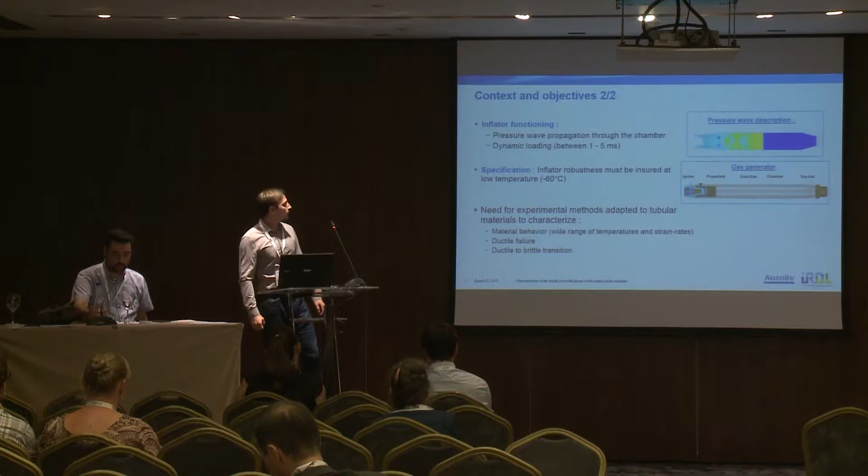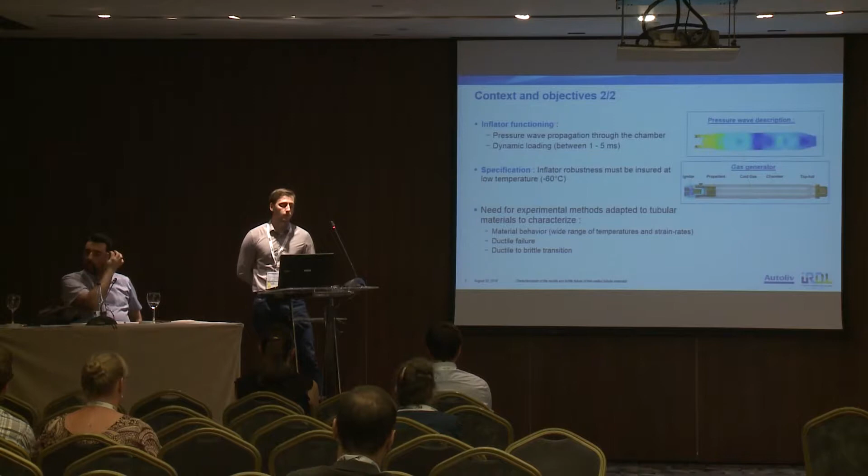There is a very thin grain size, close to 3 micrometers. Also, during inflator functioning, there is dynamic loading of the chamber due to pressure wave propagation through the chamber. In the automotive industry, you have to validate certain specifications, and the most critical one is that inflator robustness must be ensured at low temperature, minus 60 degrees Celsius. So here you combine high-strength steel with a very thin microstructure, high strain rate loading, and low temperature conditions. Brittle failure can occur, and this mode of failure is really critical.

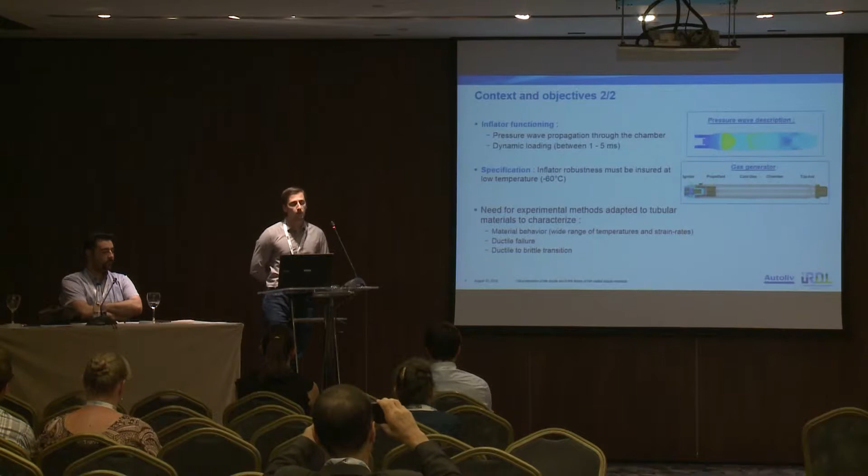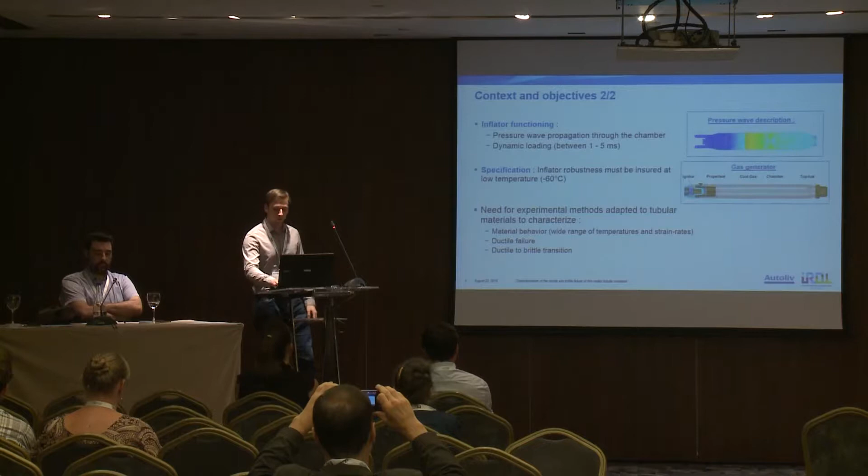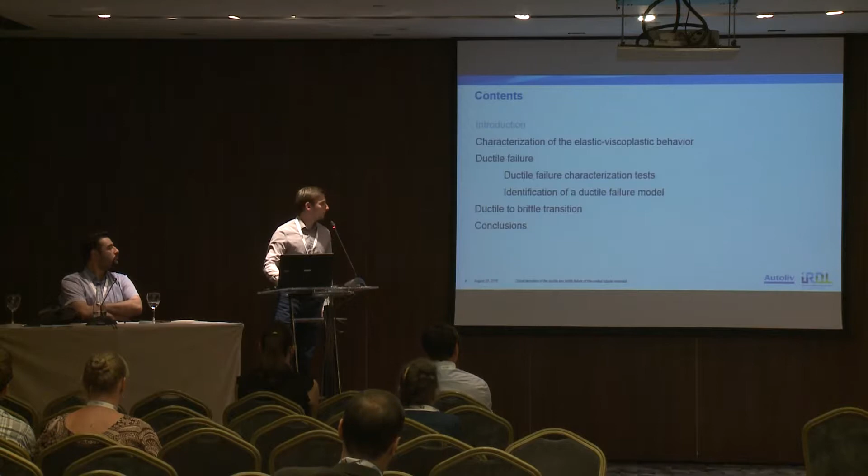So we have to be sure that it doesn't occur. That's why there's a need for an experimental method adapted to tubular materials, able to characterize material behavior, ductile failure, and ductile to brittle transition. That's why my presentation has 3 different points: characterization, ductile failure, and ductile to brittle transition. To finish, I will conclude. So let's start with the material characterization.

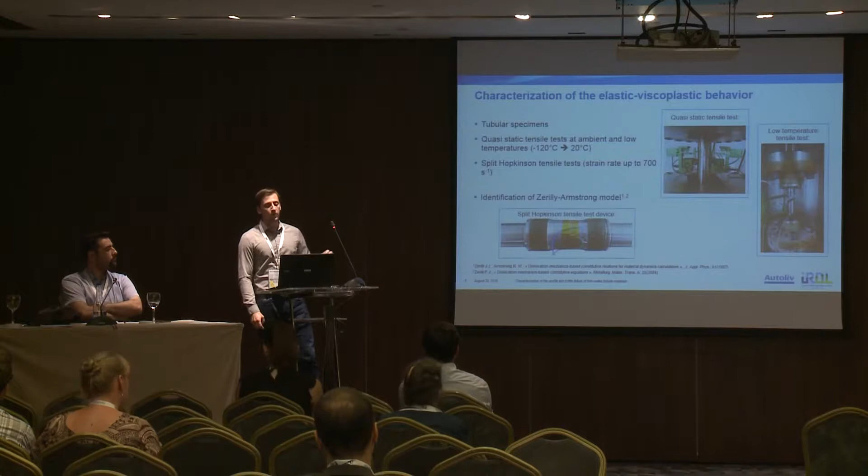First of all, I can only work with tubular specimens. Why? Because the steel supplier is not able to produce the same material in a flat shape. So for quasi-static tensile tests at room temperature and low temperature, I have to use tubular samples with a defined geometry.

Also for Split-Hopkinson tensile tests, made to characterize the strain rate sensitivity of our material, we have to deal with tubular samples. That's why we developed, in my laboratory, a new methodology to apply tubular samples to Split-Hopkinson tensile tests. If you have any questions, I could answer at the end of this presentation.

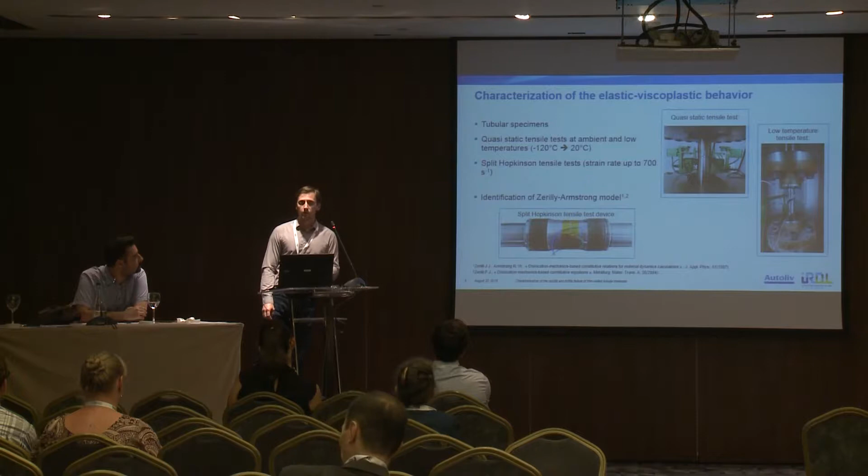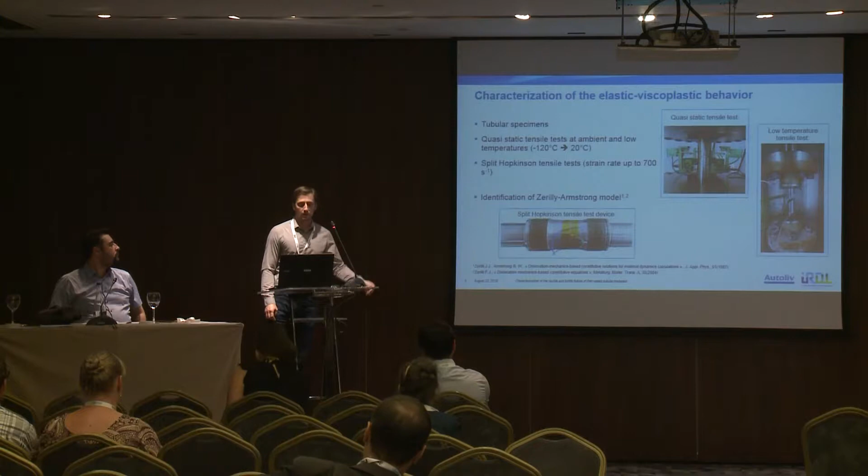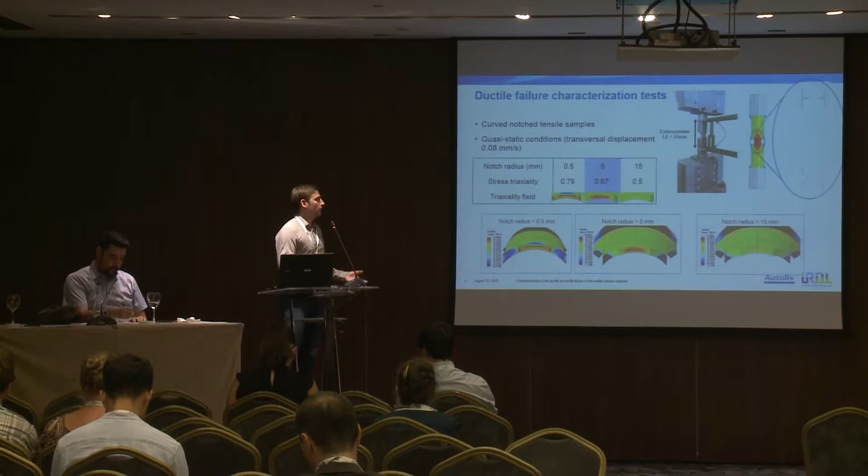Finally, with these 3 different kinds of tests, we were able to identify the Zerilli-Armstrong model and its parameters. Once the material behavior was fully defined, we started to study the ductile failure properties. To study this, we used notch samples, but here we used curved notch samples. There were many simulations, firstly to determine the 3 different notch radii that we would use.

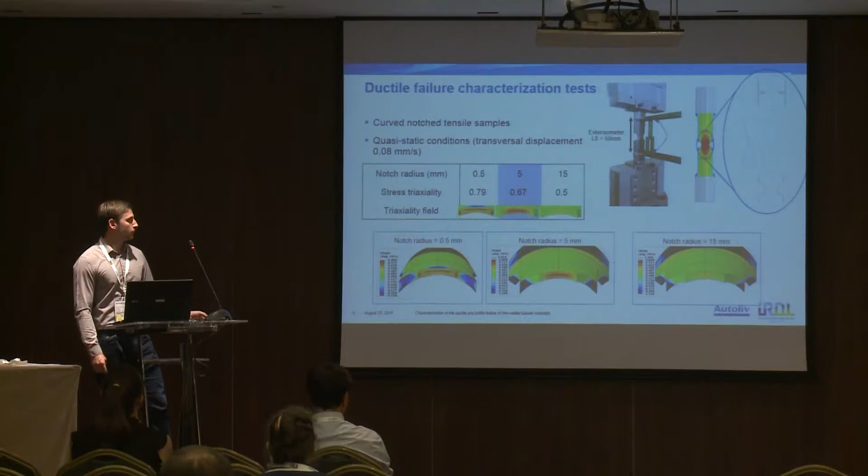As we are using 3 different radius, there are 3 different maximal stress triaxiality and 3 different stress triaxiality values. When design were stopped, we proceed to the test and get the following results: the curve force versus displacement for the 3 different notch radius of our sample.

Firstly there is a pop-in phenomena which occurs during our test. This is due to the very low ductility of our material.

In order to determine the maximal displacement, which is not given in this graphics, we used a different approach to have high sampling frequency on our test. With this kind of methodology, we were able to define the maximal displacement at coalescence, and then we were able to determine much better the damaging parameters.

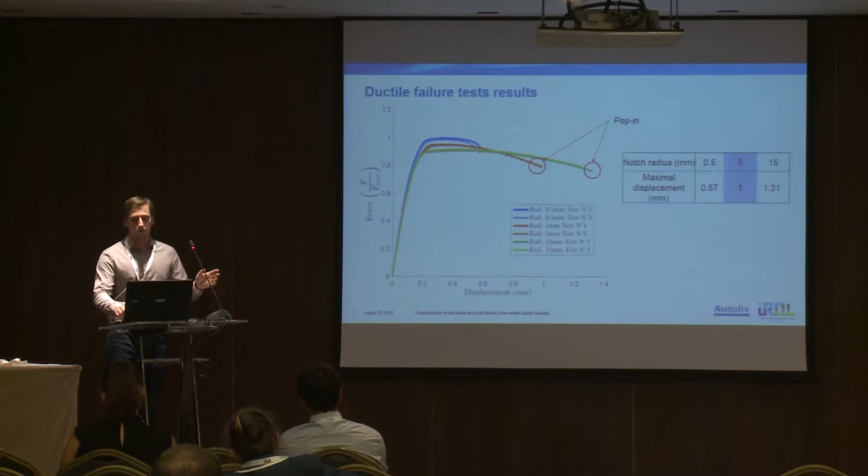So, with this test, as there is pop-in phenomena, we have to check if fracture surfaces are purely ductile or if there is any cleavage on this.

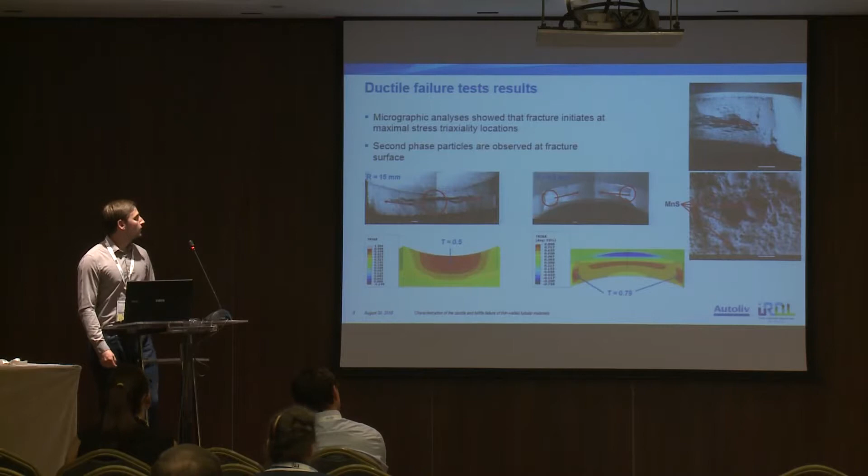Micrographic analysis showed that there is only ductile fracture surface, with the presence of two-sized dimples. This is due to the damage mechanism of our material.

Then there is a second point: micrographic analysis showed that fracture initiates at the maximal stress triaxiality location, in accordance with our numerical simulation. This is in good agreement with our previous calculation, and it will be a significant point. It will be great for us, because with this new kind of curved sample geometry, we had some doubts about the validity of those tests.

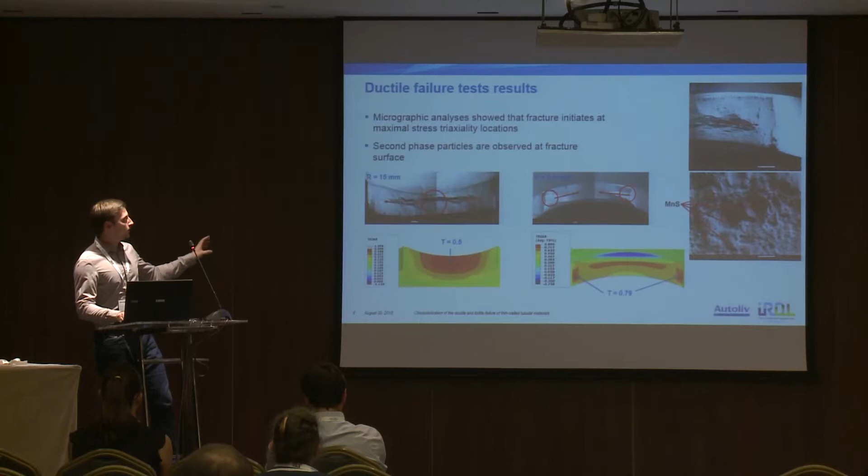As the kinematics of fracture were validated, we can start to identify the ductile failure model. We are using the famous GTN model, where you can find the expression of the yield surface here, and then we get 3 different modifications.

The first one consists in splitting the porosity evolution into 2 parts: one part from void growth, and the other part from nucleation.

For the nucleation model, we used a very recent theory proposed in a recent PhD thesis, less than 1 year old. If you have any question, I will answer at the end of this presentation.

Then we will define a coalescence criterion with the Thomason model. This is not a strict criterion, because it's not possible to find a critical value as such criterion. It's an implicit criterion.

Then, using this model, we inject this equation inside a finite element analysis simulation, and we compared the experimental results to the numerical simulation results. As you can see here, the fits were quite good.

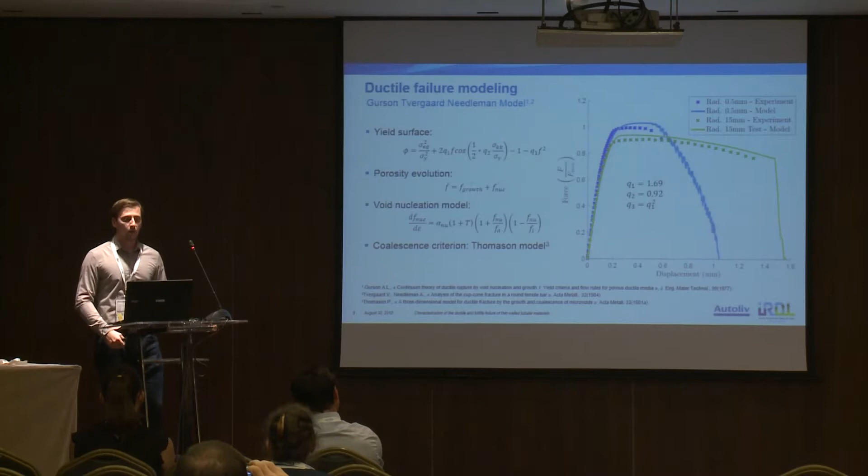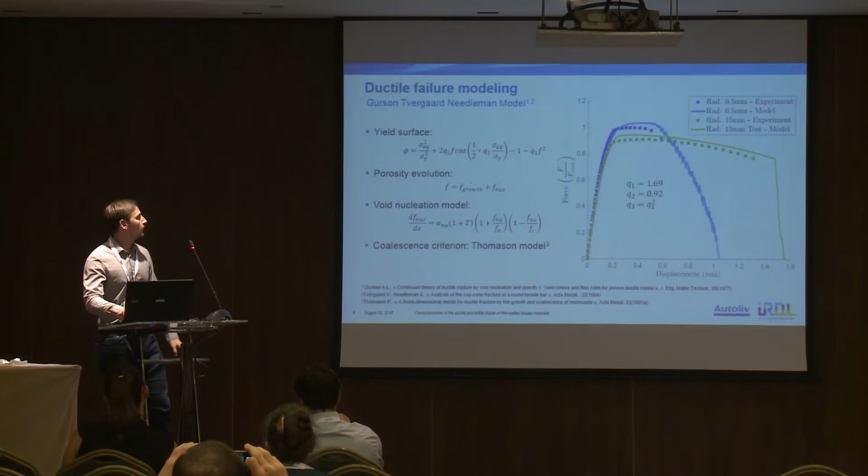We were satisfied with this fitting, and then we tried to validate this model. To validate this model, as well in an industrial context, we have to use a different test with no link to the previous test.

So here we are using a burst test. This is a really simple test because we are using an internal pressure applied into the chamber, and we increase this pressure up to rupture.

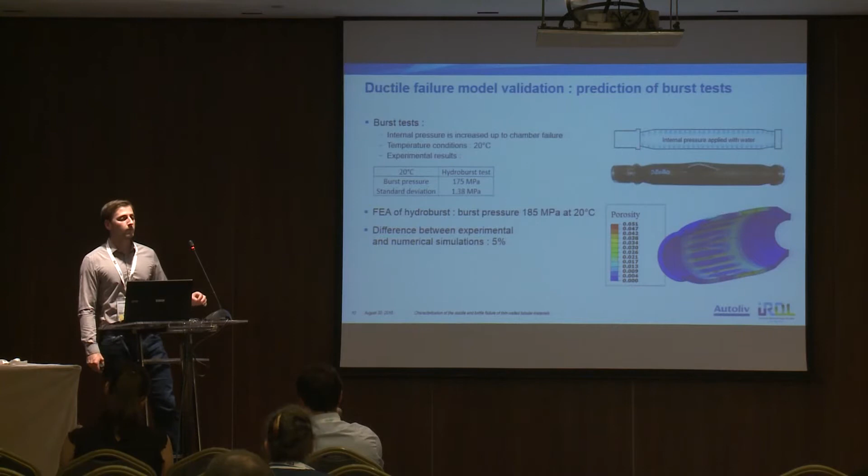When rupture occurs, we measure the pressure level, and then we compare this level with the level obtained from the simulations. Results show that we have less than 5% difference between experimental and numerical simulation. So, with this result, we can say ductile failure identification is finished.

So, let's start to talk about the ductile to brittle transition. I don't know how many minutes I have left. Five more minutes? Yeah, perfect.

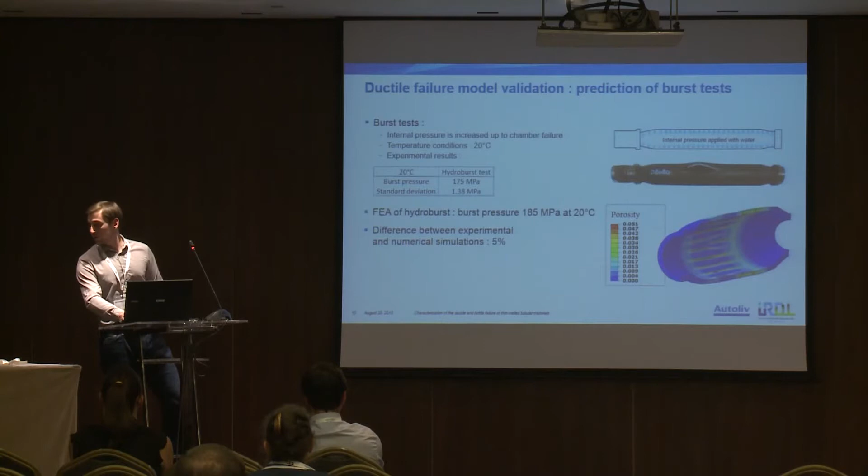So, in order to identify ductile to brittle transition, we have some difficulties because here we are using Charpy impact test. But as you know, in order to have Charpy impact test, generally we use coupons. But here we have a thin walled tube, so we have to define a new sample geometry, and here we are using a ring Charpy impact test.

Of course, specific devices in order to correctly maintain the sample were developed, and then we were trying to realize some tests.

There are 2 diameters tested: a 30mm diameter which corresponds to the material at the initial state, and a second diameter of 21 millimeters, which corresponds to a critical part of the structure. For our industrial company, it will be very interesting to focus on these 2 samples.

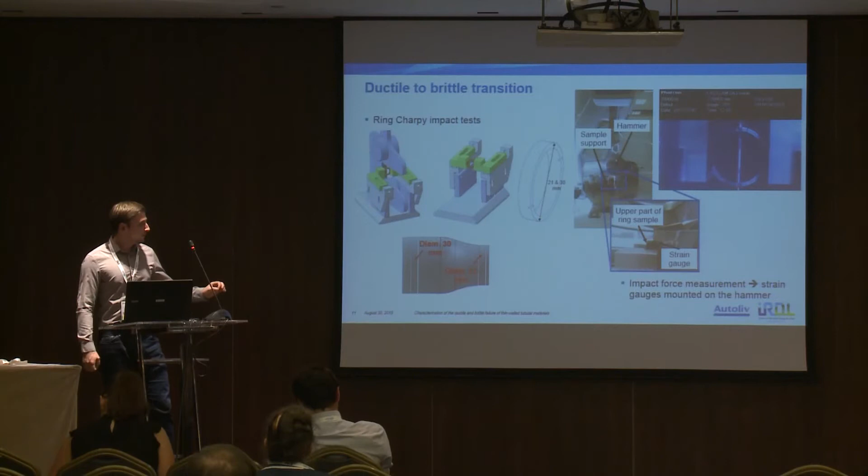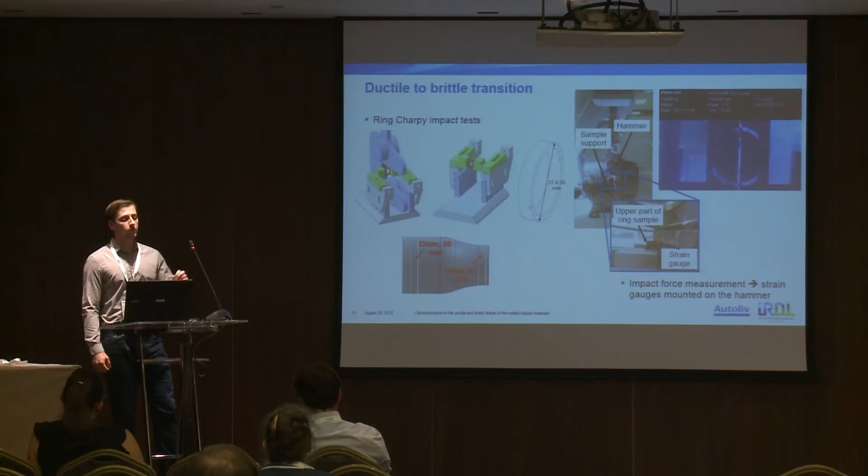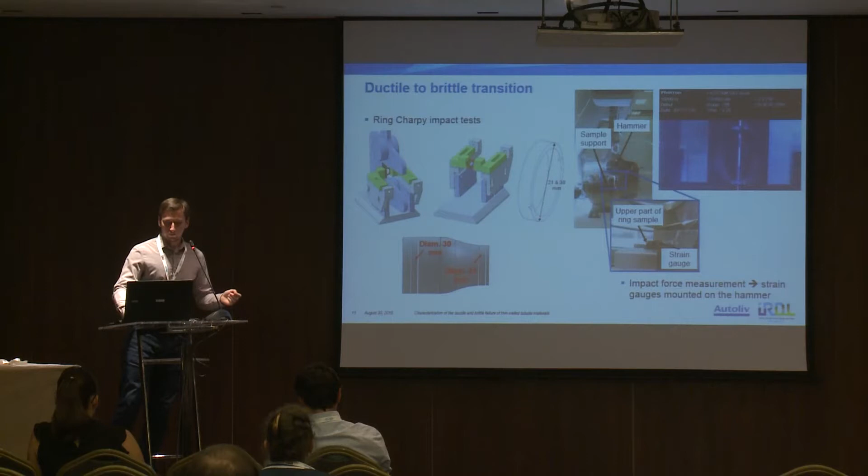Also, we have a last really important point: the impact forces measurement were done using not a classical instrumented Charpy hammer, but we mounted a strain gauge on the hammer in front of the sample. This gives quite good results, and if you want to discuss this method, I will answer at the end.

Once Charpy test samples were defined, some tests were done with these 2 diameters. As you can see here, there are really 2 different curves, and of course 2 different ductile-to-brittle temperature transitions. This is due in part to the sample geometry, and also due to the mechanical manufacturing process, because in order to obtain the 21 millimeter diameter, there is a cold deformation.

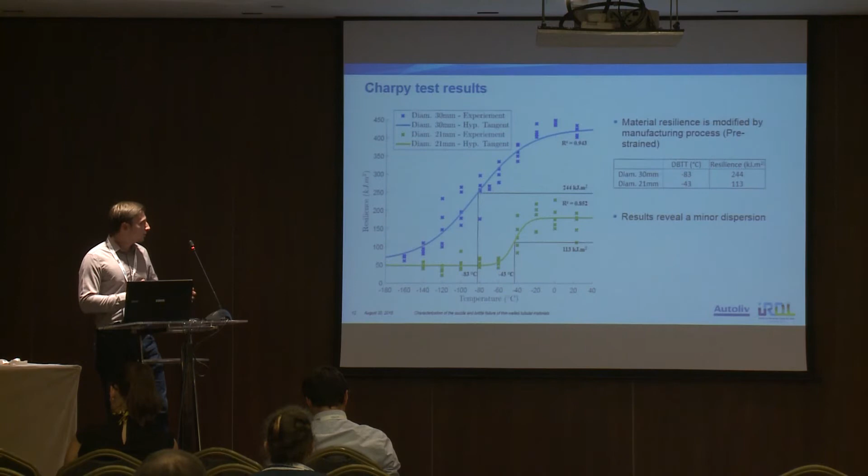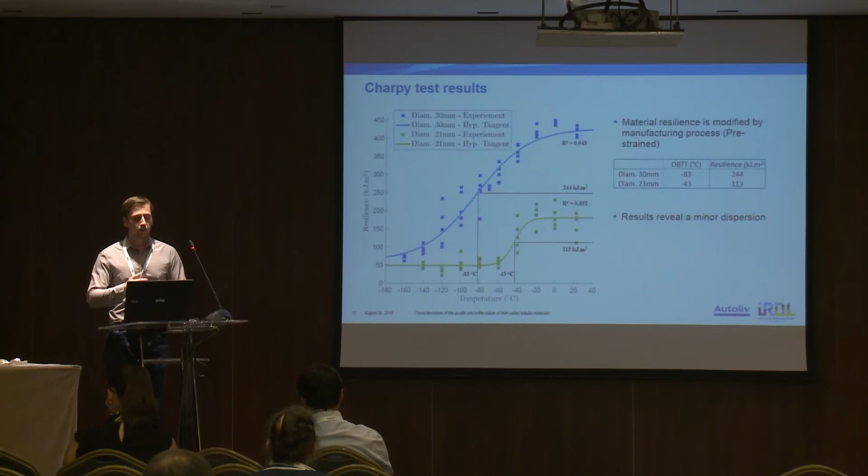Of course, there is this result, and it's really hard to compare, but there is one important fact about the resilience at room temperature. As you can see, resilience is divided by more than 2 times. So between the 2 materials, which are initially exactly the same state, there is a very large gap. We try to explain why there is this gap.

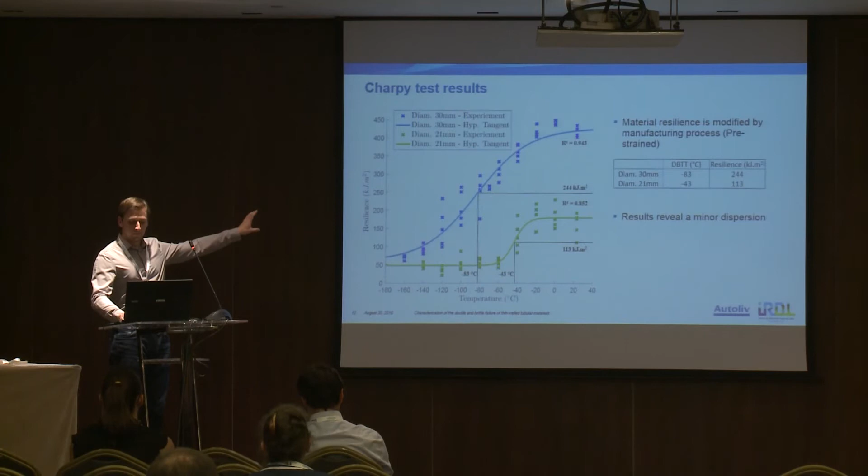In order to explain this gap, we will study the fracture surface using SEM observation.

So here there is an interesting result, because when we have exactly the same initial material and we provide a large pre-strain field to samples, the behavior totally changes. So we have to explain and explore these ways in my study.

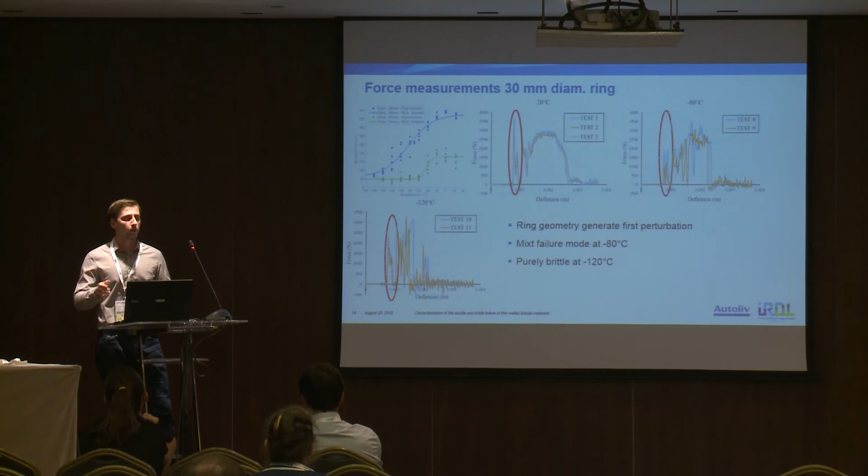Currently I'm working on the simulation of those Charpy tests in order to determine the impact of the different diameters. So I will work with exactly the same materials, and then I will compare the difference for the two diameters and the difference for two different pre-strain states.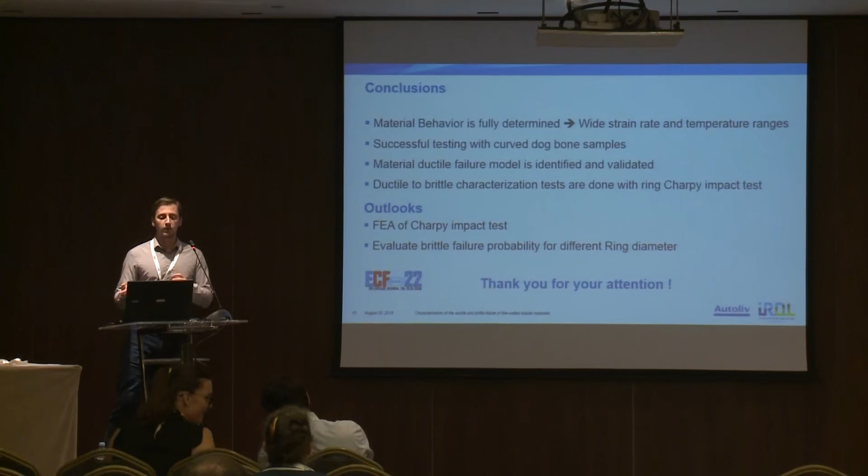So that's why my conclusions are the following. First of all, I have to say that material behavior is fully determined using a wide strain rate and temperature range, and also for tubular material. Then, for the ductile failure, the model is fully identified and validated. This is quite good for our industry and for us, because it allows us to start the ductile-to-brittle characterization study.

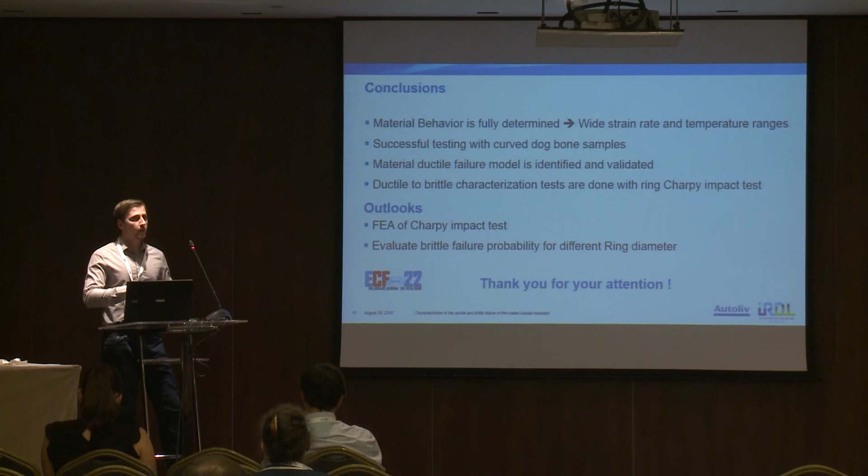As our ductile-to-brittle characterization tests are working well currently, the outlooks of this work are the following: I have to do a lot of numerical simulations in order to validate or discard the different hypotheses that we have made for the Charpy test. Finally, in order to keep the industrial context, we will apply this method to the entire structure of the gas generator. Thank you for your attention.